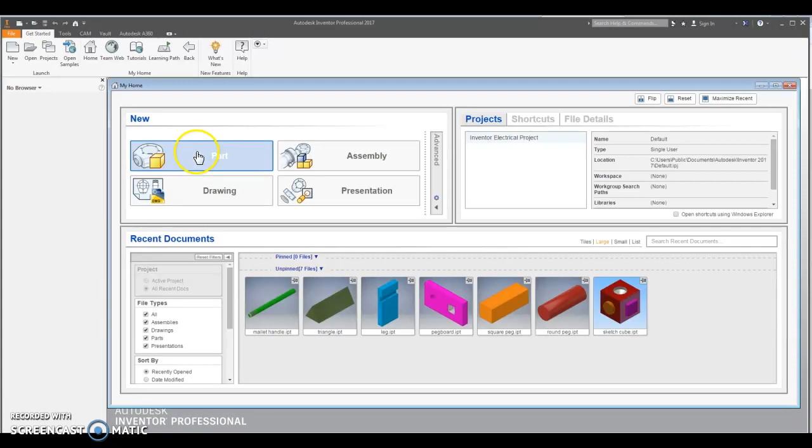Okay, today we are going to start by making a Triplatform. We'll go ahead and start our program like we do usually. Click on Part, let it load, hit 2D Sketch, XY Plane.

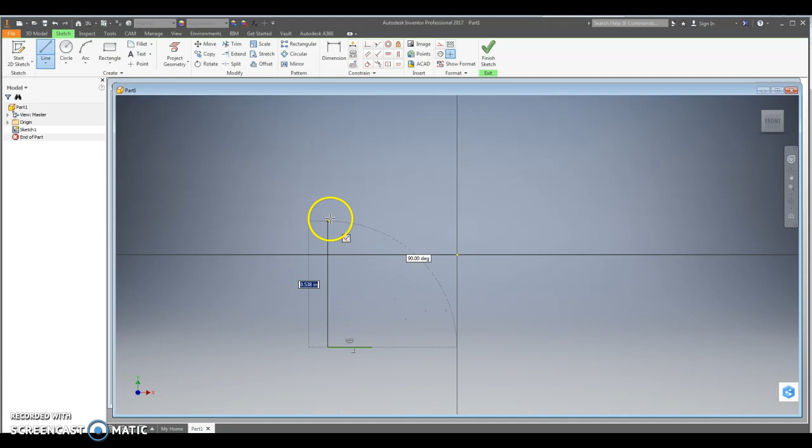Today you're going to use the Line tool and draw a basic shape that almost looks like a triangle, but has a few angle pieces in it. Starting at the bottom, draw a straight line to the left, come up vertically, go to the right horizontally, then down, and connect this at an angle, making sure these two endpoints connect. So we have almost a triangle, but these two arms make it a little different.

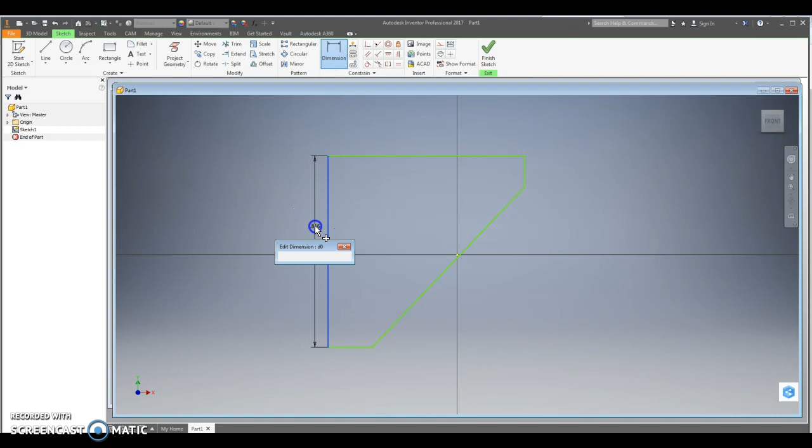Now we're going to give it dimensions. This left side of the Triplatform is going to be 46 inches, so we'll hit 46. I'm going to hit front to zoom back out. Top line is going to be 44. This right side up here is going to be 6 inches, and this lower arm is 7.75.

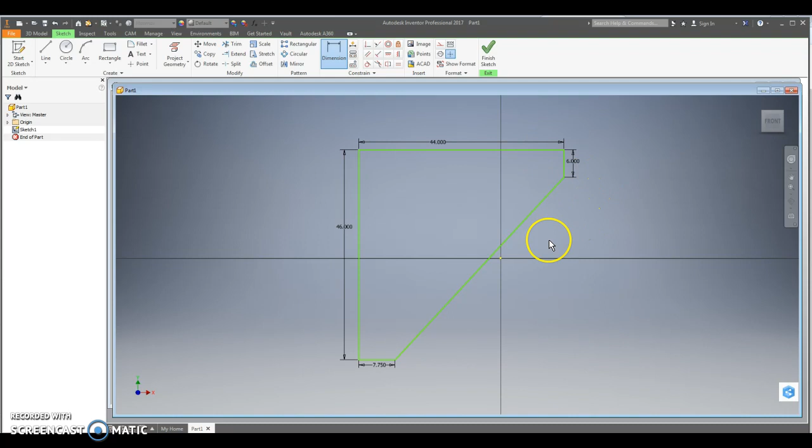You do not need to dimension the angle. If you have all your other dimensions correct, the angle dimensions itself, so it's fine. You're going to finish your sketch. I'll hit the little house here in the corner to zoom it back in. We're going to extrude this platform the same way we did the main platform in the climbing wall, 3 inches.

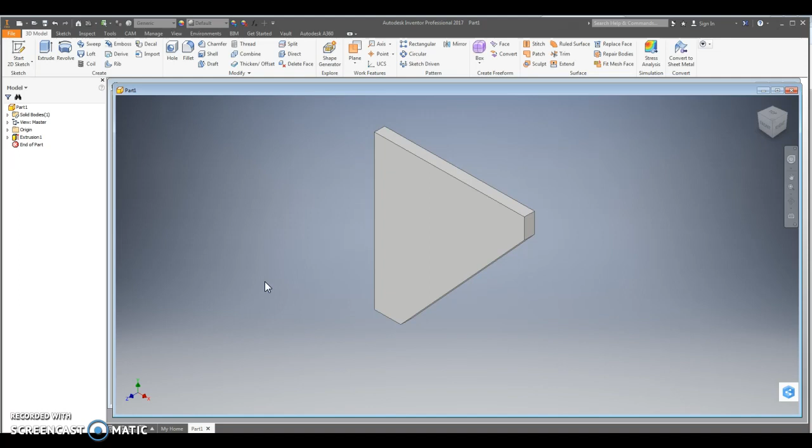Now the only thing we have left to do is put a hole in each of the corners of the Triplatform so our poles can fit in them. If you remember, based on the climbing wall or the main platform, we have to do a 2D sketch and click on the front so we can have our drawing tools come back. We're going to use that point again - the point is how we create holes.

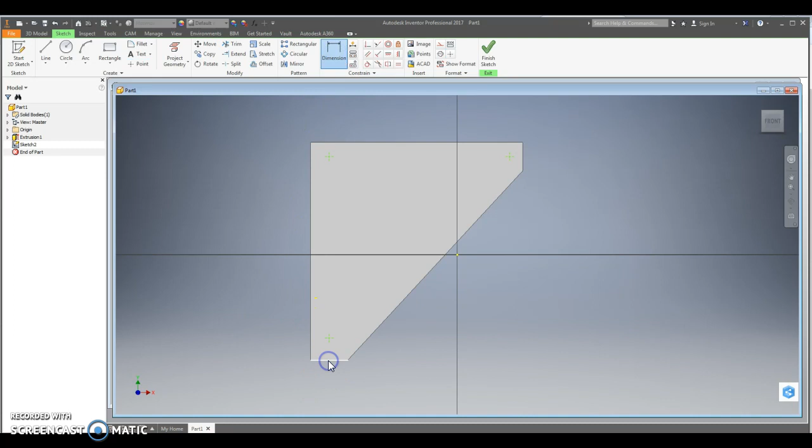So I put one here at the bottom, one here in the left top, and one here in the right top. Just like the main platform, those holes or points need to be a specific distance from the edge - 4 inches. I hit dimension, click this bottom edge once, then click this point once, and make that 4 inches. I click the left edge once, then the point again, and make that 4 inches.

We're going to do that the whole way around - left edge to the point, top edge to the point, 4 inches. Right side to the point. Missed it, I keep missing it. Right edge and the point. Alright, let's hit dimension again. It's not letting me do it. There we go.

It does not want to do this one. Let's start with the point to the edge instead. There we go, 4 inches. Top down to the point, 4 inches. Sorry, that can be frustrating, but getting each of these 4 inches apart from the edges is great.

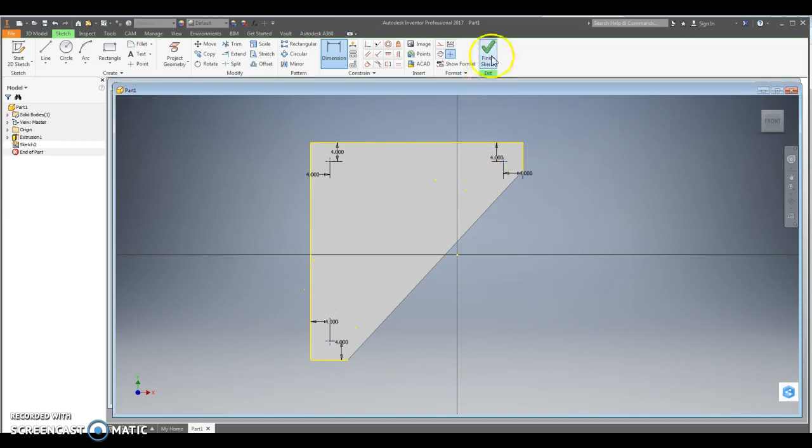You'll finish your sketch, do your hole. We're going to go through the whole thing again, so make sure it has termination through all, and the hole diameter is going to be 4 inches. You should see these turn into holes, and if not, you might have to go in and click actually on the points to make the hole happen, and you'll hit OK.

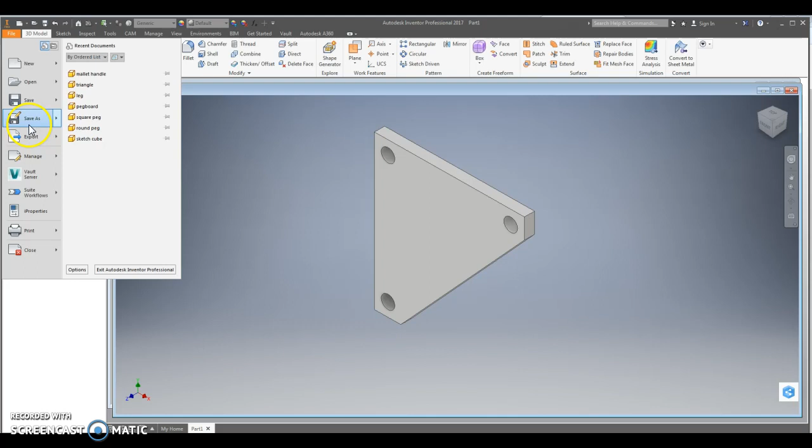You'll then go up to File, Save As. Again, make sure your folder opens up, or your name. You're going to call this triangle - you can see I've already saved it here as that, so I don't need to save it today. So your ultimate goal is to get the triangle done.